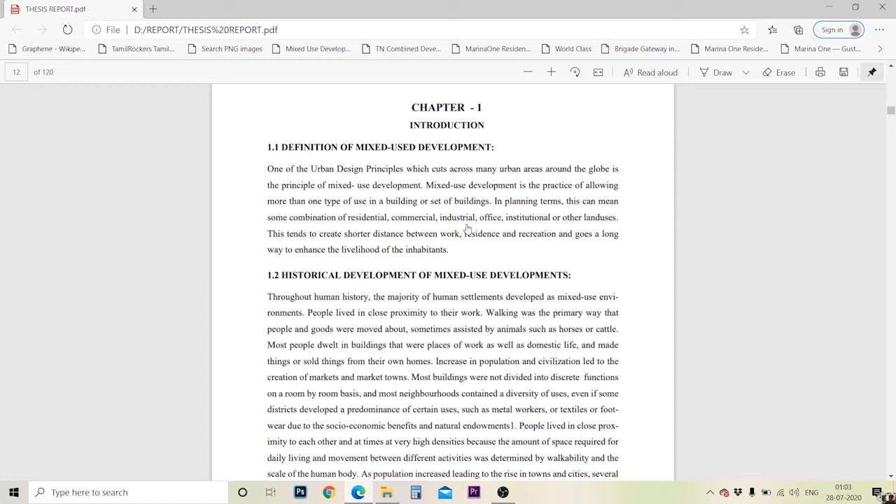Here is the introduction about what mixed-use development is, and how it has been practiced periodically over time, how it declined during the industrial period, and how, due to industrial growth, a new urban planning approach emerged in the 20th century, and how mixed-use development has since returned to modern urban life.

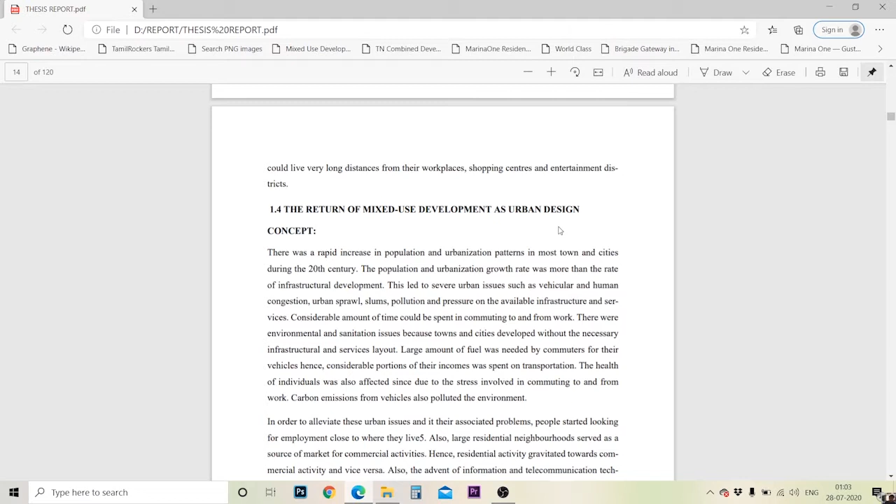These are the related theories about mixed-use development: transit-oriented development, smart growth, new urbanism, and intelligent urbanism.

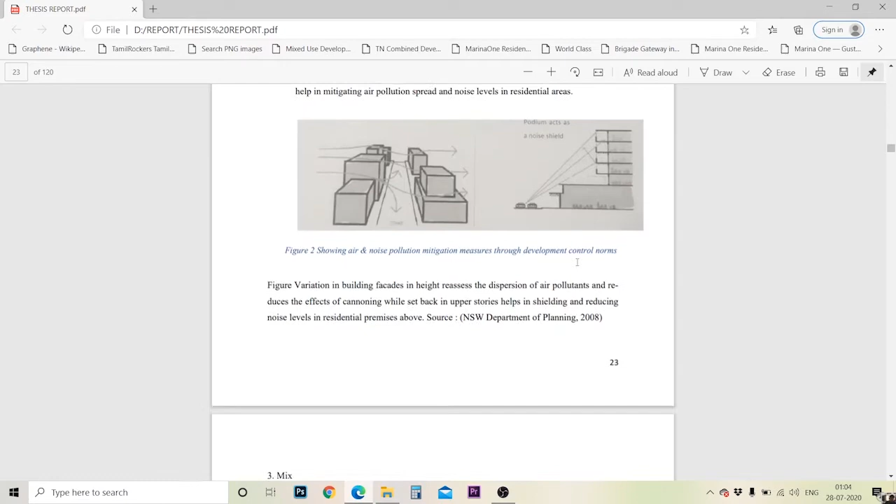There is a planning guide for mixed-use areas. These are the regulations for mixed-use development in Bangalore. The site is located in Bangalore, so the setback rules and norms apply accordingly.

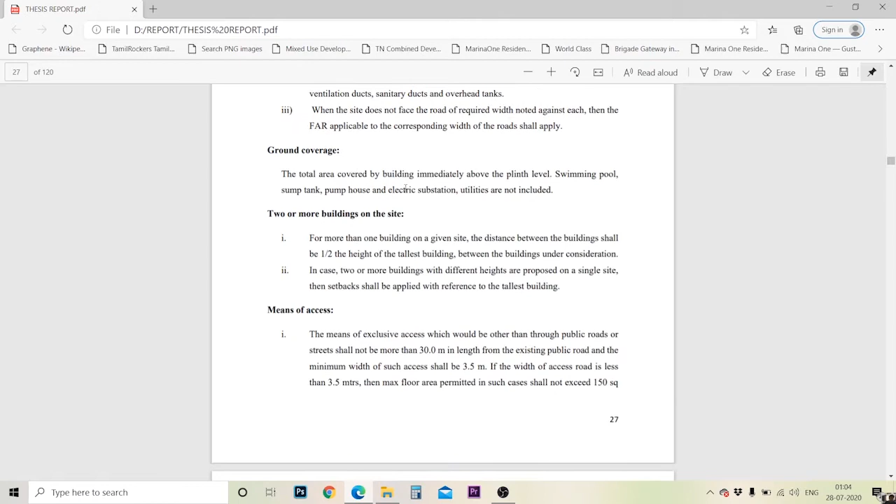This is the mixed-use development zoning regulation. The main land use should be residential, and the remaining should be commercial and other uses. The residential main use should be 70 percent of the land, and the remaining 30 percent of the total built-up area.

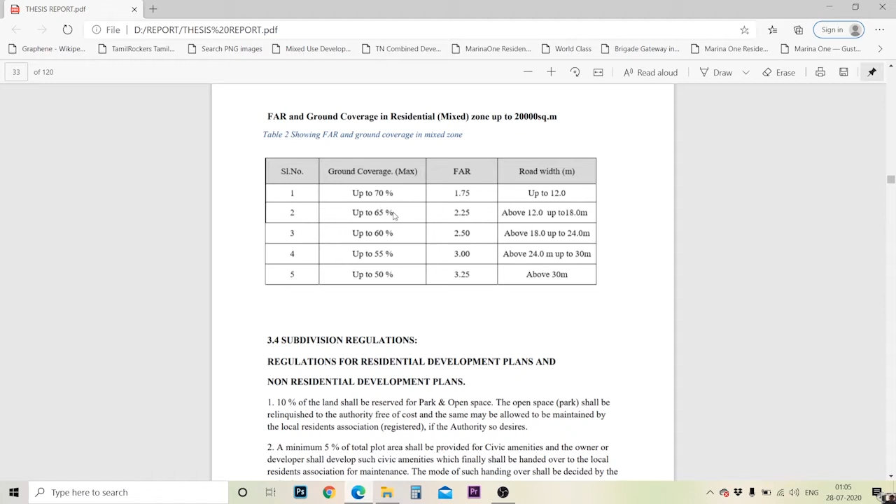For my site, the FSI is considered 2.25, as the road width is about 18 meters, and the ground cover is 65 percent. This is the parking norms and requirements, and amenities used. In chapter 4 we will discuss the case studies.

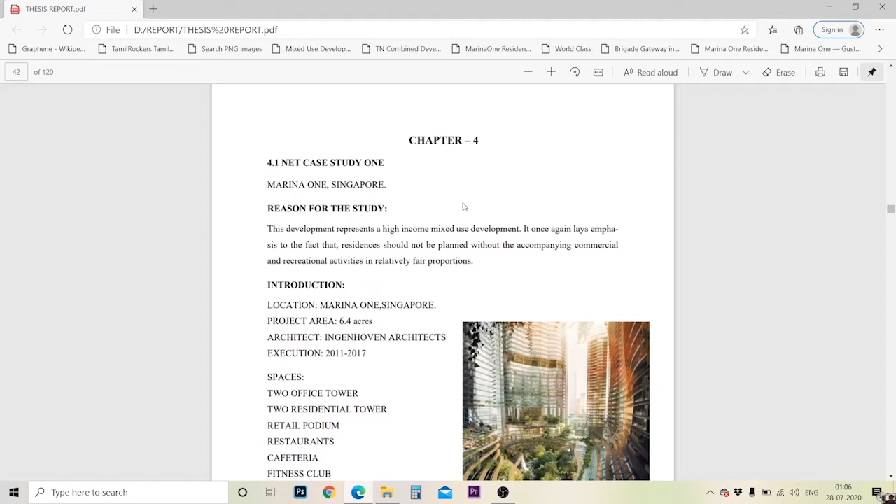This is my case study, Marina One, Singapore. Located in Singapore, this project site is around 6.4 acres, designed by Ingenhoven Architects.

It is a high-rise mixed-use development, consisting of 4 towers: 2 for office and 2 for residential, with a retail podium underground. All the entertainment and activities are given in the underground basement area.

One of the main features of this building is its pedestrian connection to four metro stations via the basement. This is one of the major advantages of this design.

This is the external view of the building. As you can see, curvy shading has been provided on the interior of the building to minimize heat gain and control heat entering inside the building.

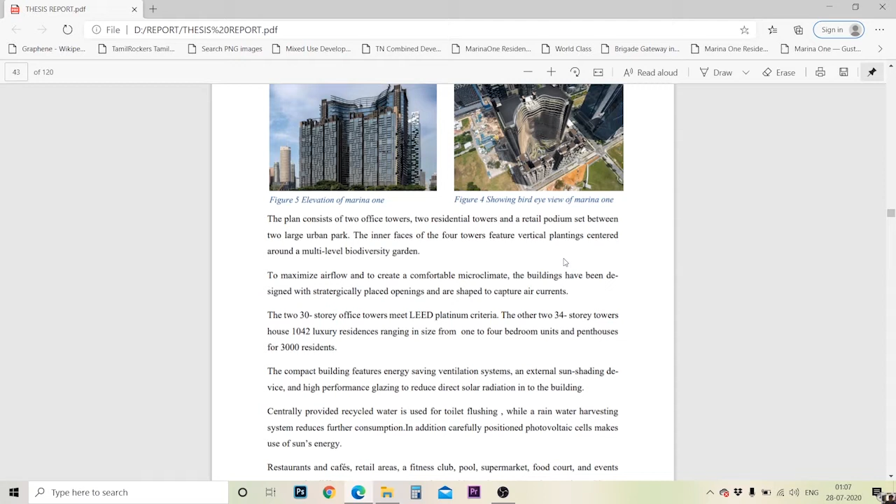This building has received LEED Platinum certification. The 34-story tower has 1,042 residential apartments ranging from 1 to 4 bedroom units, housing 3,000 residents.

Restaurants, cafes, retail areas, supermarkets, and food courts have been placed on alternate floors. As you can see, these are the metro station connections from the building. This is how the form of the building evolved, from concept sketch to external output.

This shows the number of units provided in the apartments with their square footage. One bedroom units have been provided in majority, since most residents work in offices, mostly needing 1 BHK units, so a higher amount of 229 units has been given.

The Marina One office has 1 lakh square feet office floor plates across a 30-story height, and it has direct connection to MRT lines.

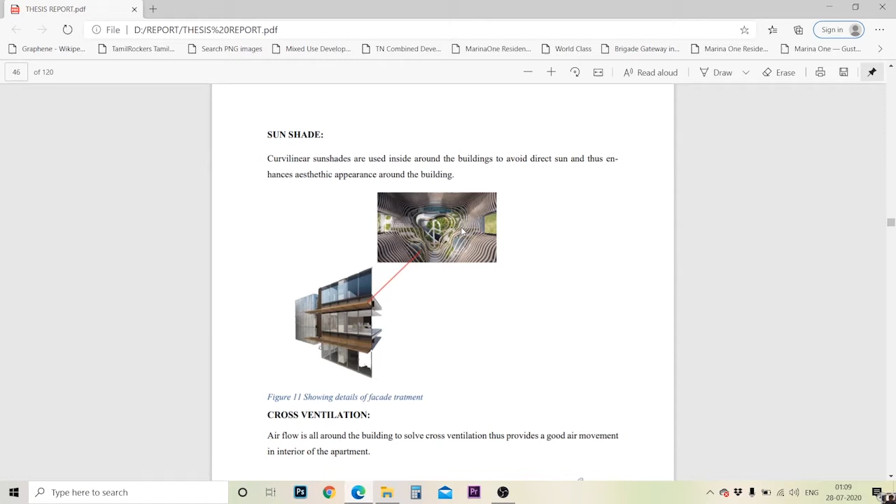This is the sunshade detail, showing curvilinear sunshades designed according to sun movements responding to the site. This apartment has been provided with cross ventilation in all units.

The second case study is Kohinoor Square. The reason I chose this is it is one of the only mixed-use developments with high-rise buildings built. This site area is around 4.6 acres, with residential, offices, shopping mall, a five-star hotel, and multi-level car parking.

This is a 50-story, 203-meter tall high-rise office building. On top of this is a hotel, restaurant, and recreational activities. It is one of the first skyscrapers in India to achieve LEED certification.

The climate of Mumbai is wet and dry. Its coastal, tropical location ensures the temperature does not fluctuate much throughout the year.

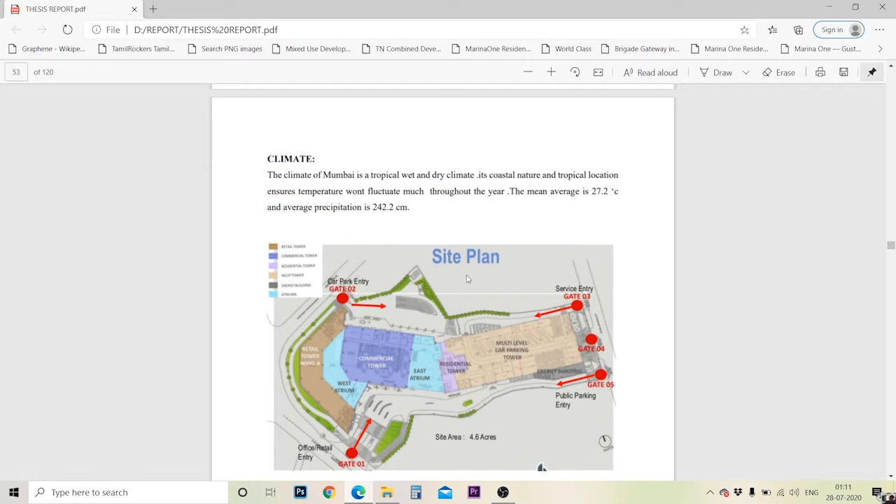This is the master plan. There are five entrances to this building. The main entrance from gate 1 approaches the retail tower and commercial tower. The second and fifth gates allow direct entry to the multi-level car parking, and gate 4 is for the residential tower.

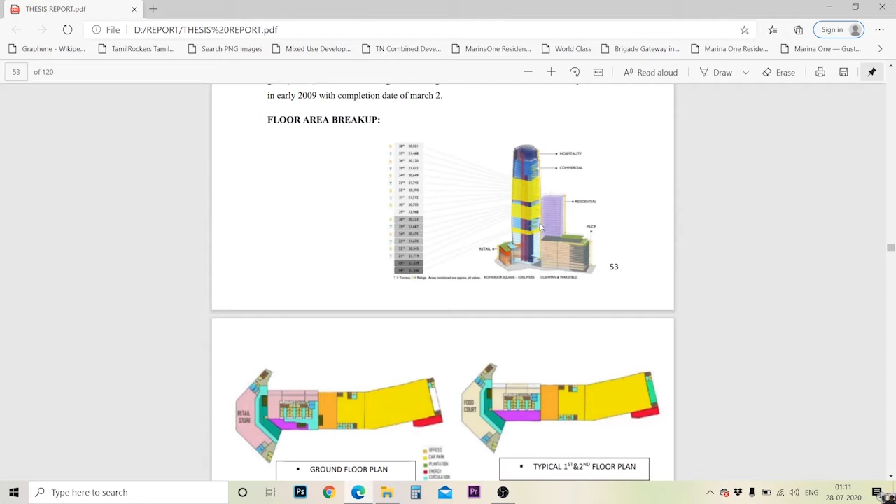The entries have been defined separately for each use. This is the floor area breakup. At the top of the tower you can see the five-star hotel and food court, behind which are the commercial offices, and at the bottom are the retail areas. The second level beneath the office tower is the residential unit.

It stands on top of the multi-level car parking, which is about 13 floors.

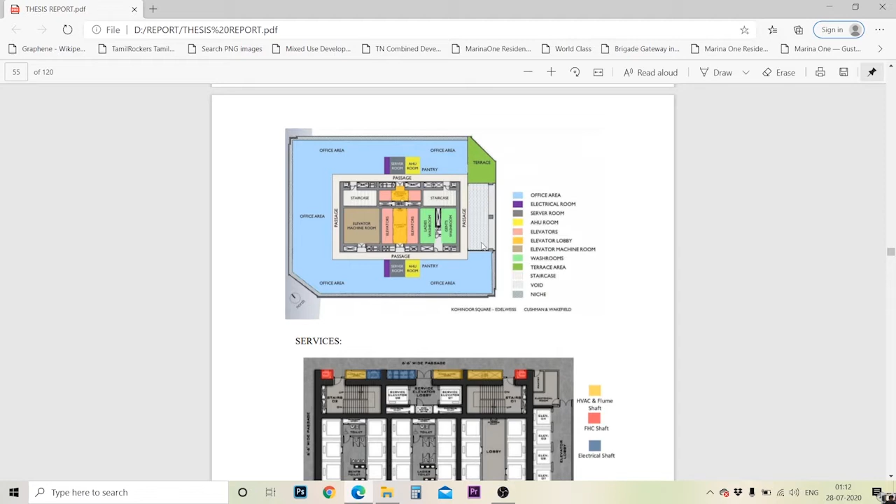These are the services provided around the core. The core is placed at the center, around which office spaces are provided for clear sunlight to minimize energy cost.

This is the office floor plate. The column placement from one column to another is 9.55 meters.

The footprint analysis: the multi-level car parking has capacity for over 2,000 cars. The first 13 floors of the building are used for parking, and the refuge floor is placed at the 11th floor.

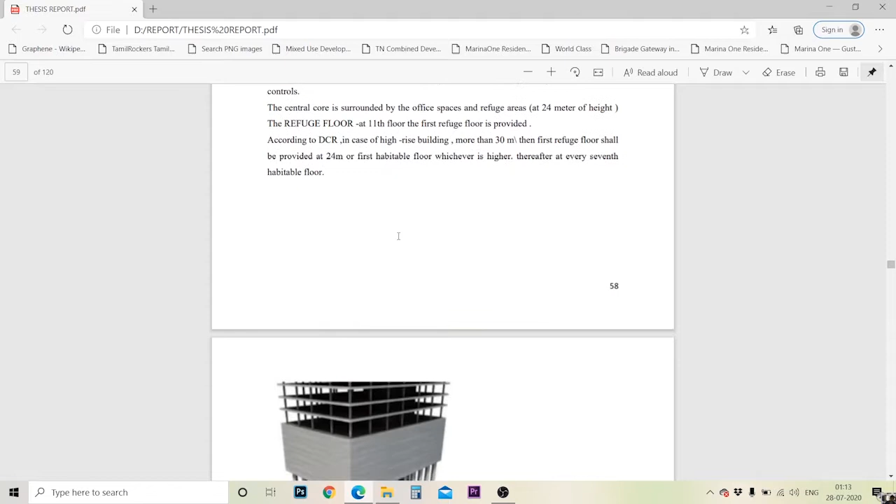The size of the column is 1.8 meters by 1.8 meters, with an average span of between 9.5 meters.

This is about the Kohinoor Square case study. The third one is a live case study which I visited in Bangalore - Brigade Gateway. It is a mixed-use development with horizontal development, and the first constructed mixed-use development in India.

Built horizontally, it's located in Malleswaram. The project area is around 40 acres, designed by HOK, and it has North Star Office Tower, apartments, Galaxy Club, Orion Mall, Brigade School, Columbia Asia Hospital, Sheraton Hotel, and a man-made lake at the center uniting all of it.

The project consists of 13 residential towers, each ranging from G plus 16 to G plus 18 depending on area, totaling 2.2 million square feet.

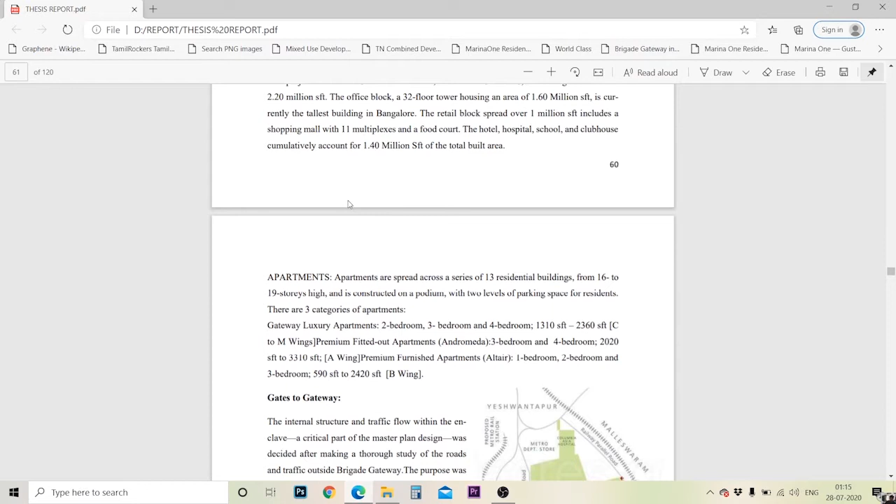The office block has a 32-floor tower housing an area of 1.6 million square feet. The retail block, spread over 1 million square feet, includes a shopping mall with multiplexes and a food court. The hospital, school and clubhouse cumulatively account for 1.4 million square feet of total area.

The apartment building is 19 stories high, constructed on a podium with two levels of parking. It has three categories, differing from two, three and four bedrooms in square feet.

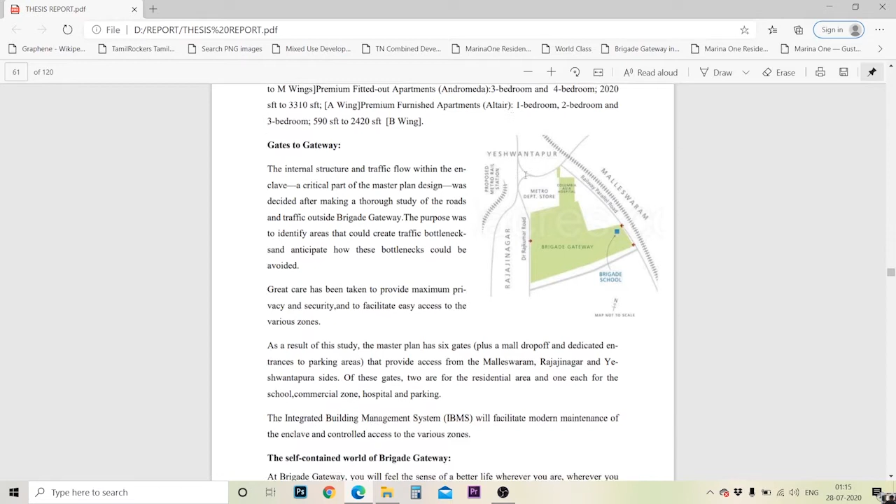You see the site plan here. This is the apartment area, this is the shopping mall, this is the office tower, and this is the multi-level car parking. This is the five-star hotel, this is the hospital, and this is the Brigade School. Each of the entries has been defined separately for private purposes.

The office, apartment, and entertainment activities have been united through an artificial lake to create an interactive space. This is a view of the man-made lake from Brigade, which covers around 2 acres of land.

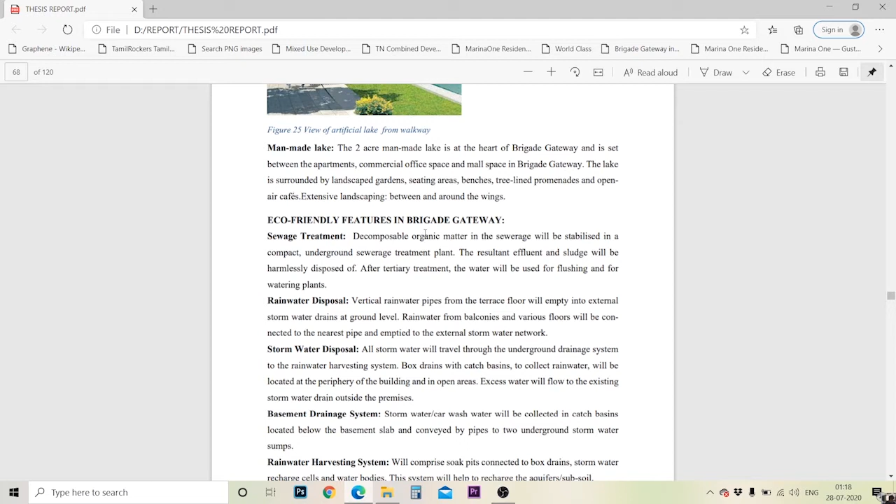These are the eco-friendly features provided in Brigade Gateway. They also provided a sewage treatment plant, rainwater disposal, stormwater disposal, and a basement drainage system, all well planned as part of the site's infrastructure management.

Apart from floor plans, this is the Orion Mall plan.

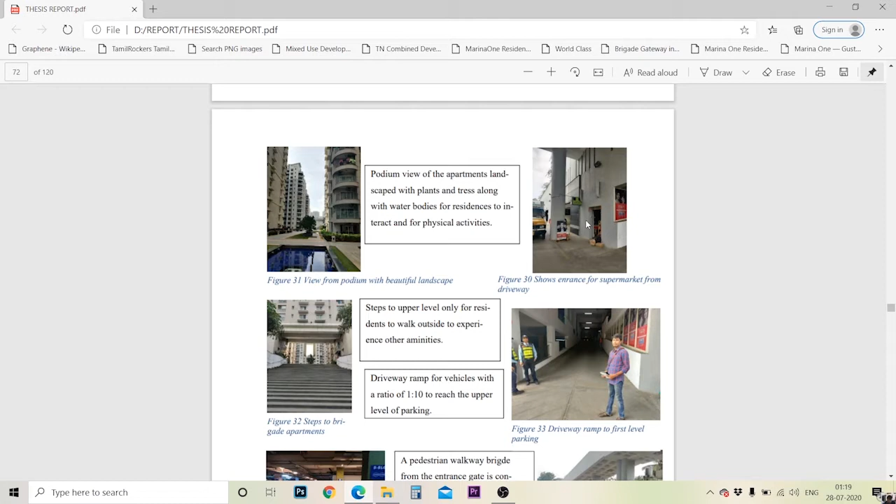These are the site photos. This is the podium view of the apartments. This is the supermarket, which is very tiny, but it's okay since there is a mall there so people can go for larger purchases of goods.

This is the entrance walkway with stairs to the apartment podium level, and this is the basement entry.

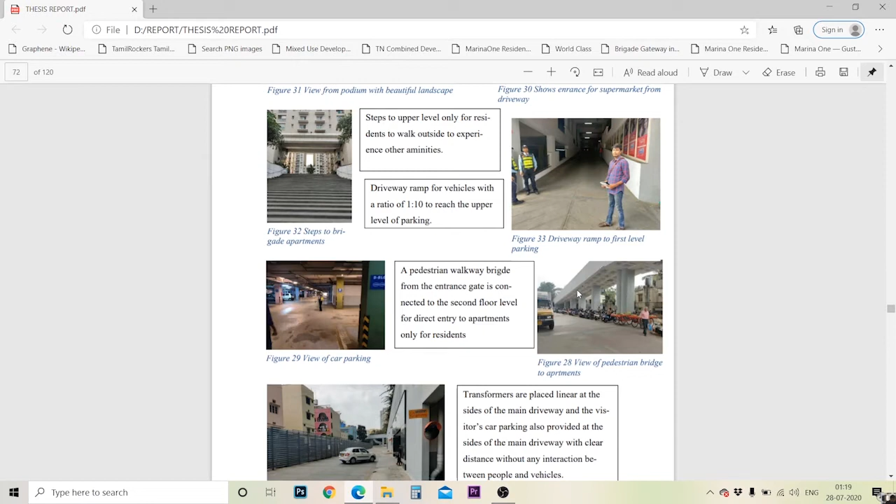This is the podium view, and this is what's called the sky bridge - it directly allows residents to move from the street to their apartments.

These are the transformers and electrical control areas, placed on the sides of the driveway.

Another live case study is from Bangalore, called Mantri Alpyne. It's a residential mixed development located in Banashankari. The project area is 10.23 acres, by architects Mantri Developers Private Limited.

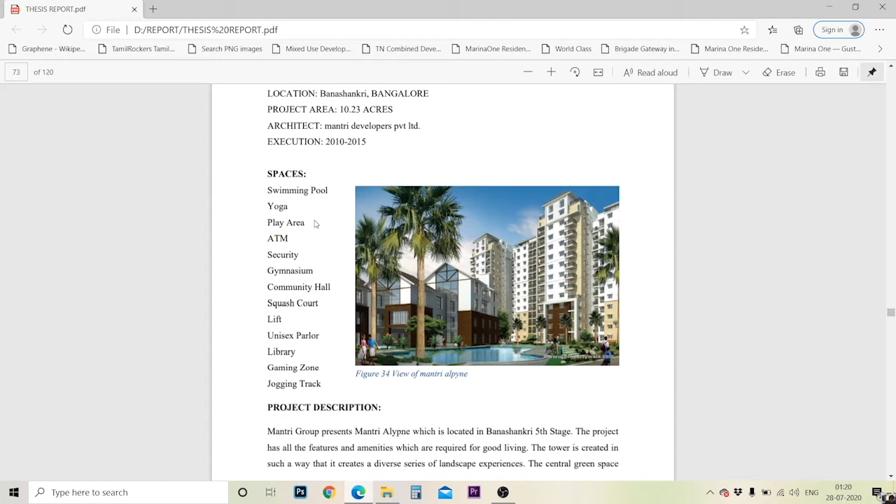Constructed between 2010 to 2015, it includes a swimming pool, yoga area, play area, ATM, security, gymnasium, community hall, squash court, lift, and gaming zone.

This is the site location - you can see the north. The site plan covers almost 18 towers with a clubhouse and central park.

It has a northeast entry. Primary vehicular movement has been restricted to the periphery. Blocks are clustered and wrapped around the primary driveway, and the entire central zone forms a park-like ambience with seamless pedestrian movement.

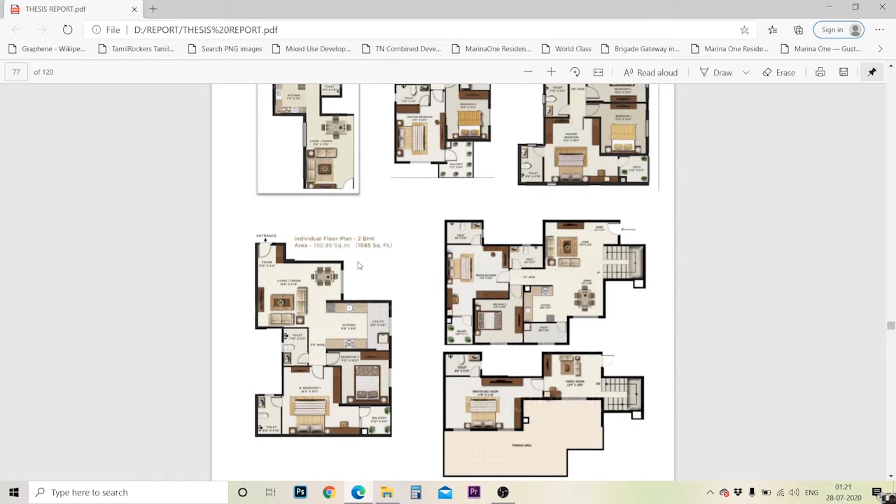These are apartment floor plans. These are the 2 BHK units, and there are a lot of types in 2 BHK. This is the overall floor plan. There is a two-wing type, wing A and wing B, placed respectively in order. These apartments and the toilets have been ventilated through ducts.

So, clubhouse. The clubhouse has a variety of entertainment activities and sports, and the services they provide.

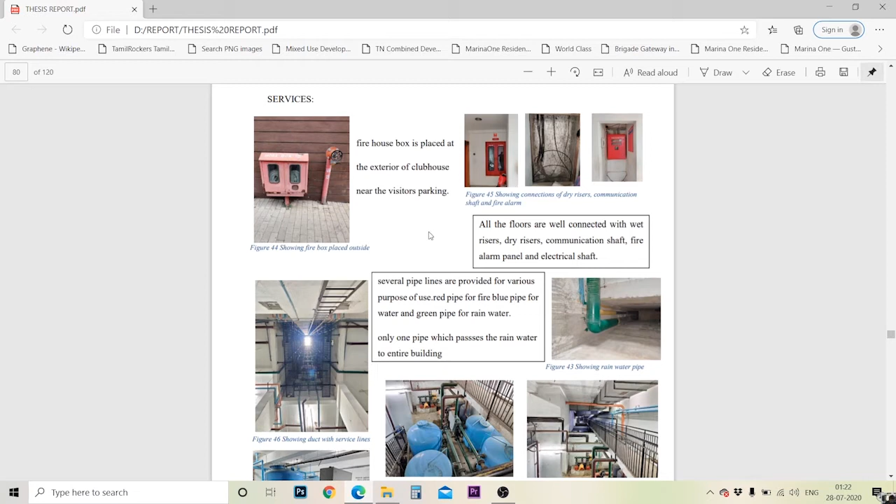Each apartment has a dry riser and communication shaft. This is the shaft duct area where all the pipelines have been connected. This is the rainwater system. At the basement level, they have sewage treatment in basement level 2, and in basement 1 they have a water treatment plant.

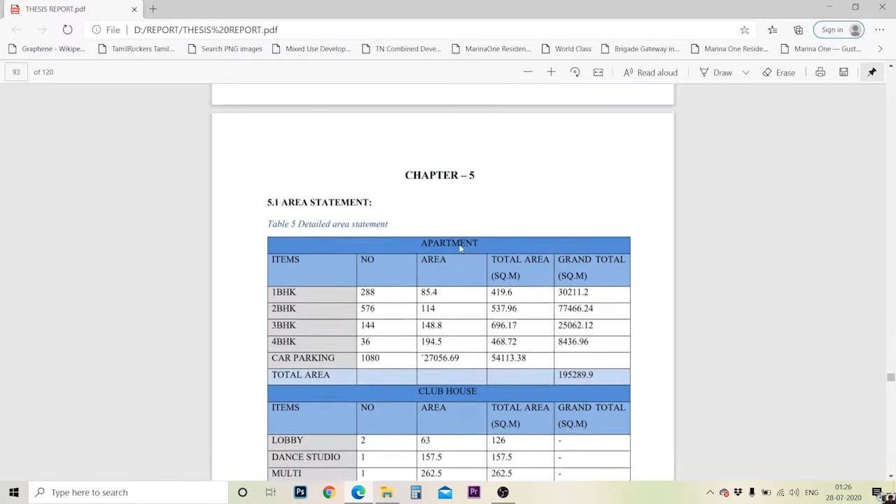Chapter 5 is about area statements, all detailed in this. You will have a detailed area report.

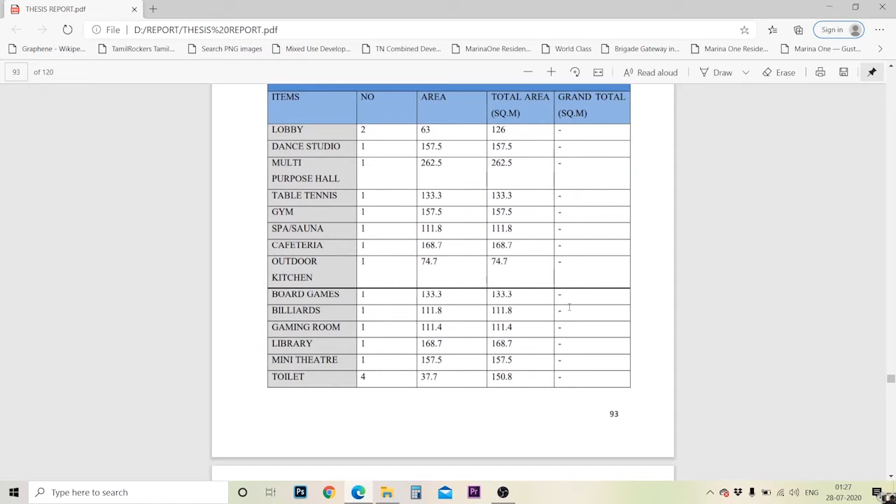Okay, let's see about site analysis. It's located in Hebbal. Hebbal is located on the north side of Bangalore. It's one of the famous places in Bangalore, Hebbal area.

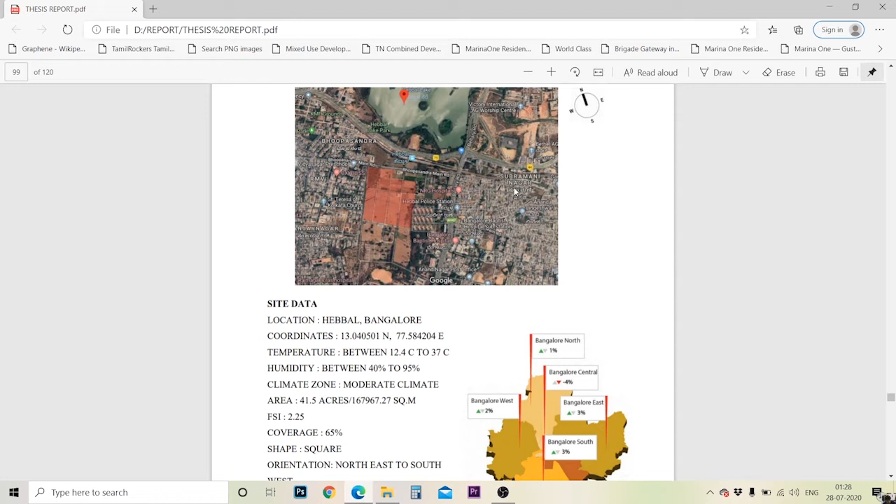From the beneath, my site has been located. In between, the railway track has divided my site and the Hebbal lake.

Okay, why did I choose Bangalore? Bangalore has been one of the fastest growing cities of India. It is also known as the IT hub. Many high net worth individuals have been growing in Bangalore, mainly in the central business district, secondary business district, Whitefield, and North Bangalore.

Due to more traffic conditions and pollution in Bangalore, many offices have been providing residences to their workers nearby. It has been changed to mixed-use developments, as you can see in the case studies.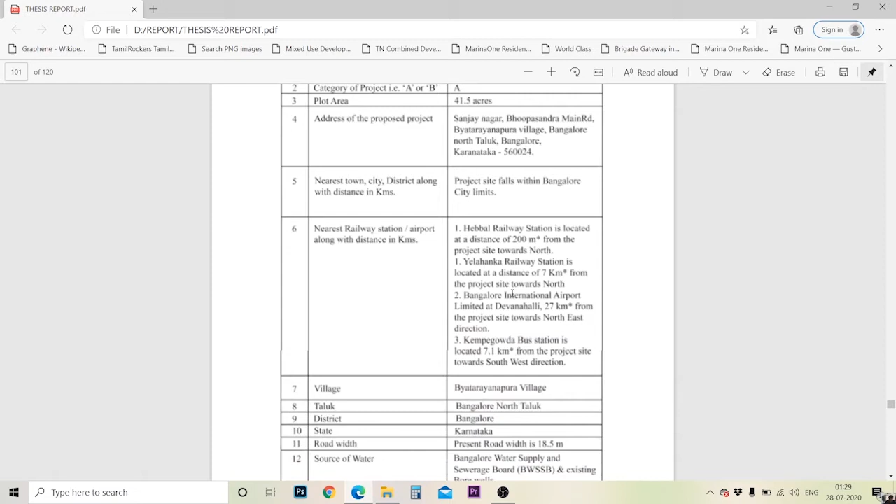This is my site details, nearby proximity. You can see the airport. The railway station is very near from the site. In the future, there is also metro planning in that area, so it is very easy to communicate to different areas.

And some portions of the site, you can see in this image, there is a coconut plantation here, coconut trees.

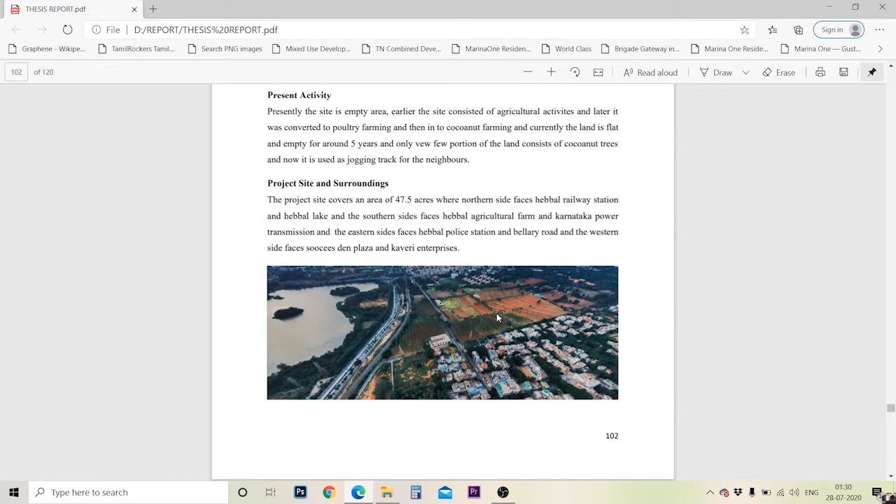This is the existing site. These are the coconut trees in the site. I just retained these coconut trees except a few, and these few have been transplanted to another area.

The site is surrounded by residential and commercial zones. This is the major wind direction. This is the sun path.

As you could see in this image, this is a coconut tree, and at the end of this site you will see a drainage. So all the major infrastructure is near to the site.

Okay, let's see my presentation sheets in detail.

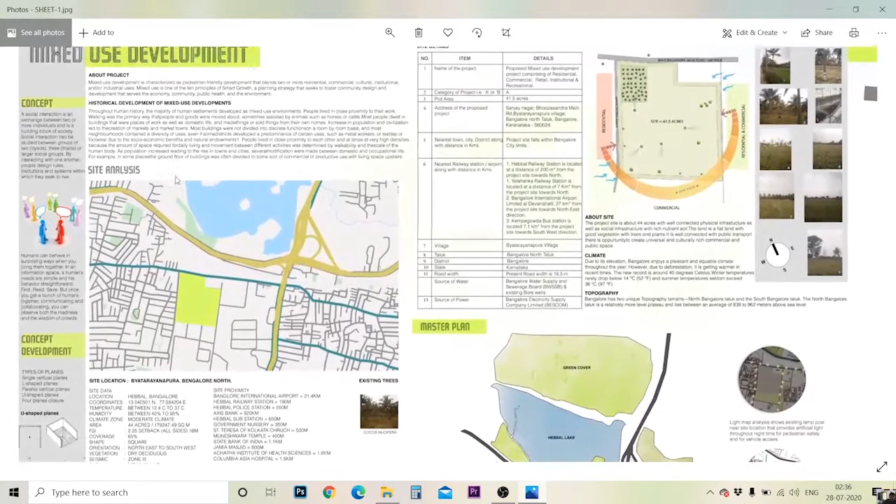Here is about the project and the historical development of mixed-use development. The thesis concept is about social interaction. Social interaction is an exchange between two or more individuals and is a building block of society.

The reason why I chose social interaction: in day-to-day modern life, people face many stressful activities around the world due to environmental degradation, pollution, and other personal impacts on human beings. I think this is mainly due to less interactive work they perform in their day-to-day life. To overcome these effects, I introduced the concept of social interaction throughout my design.

Let's discuss it later.

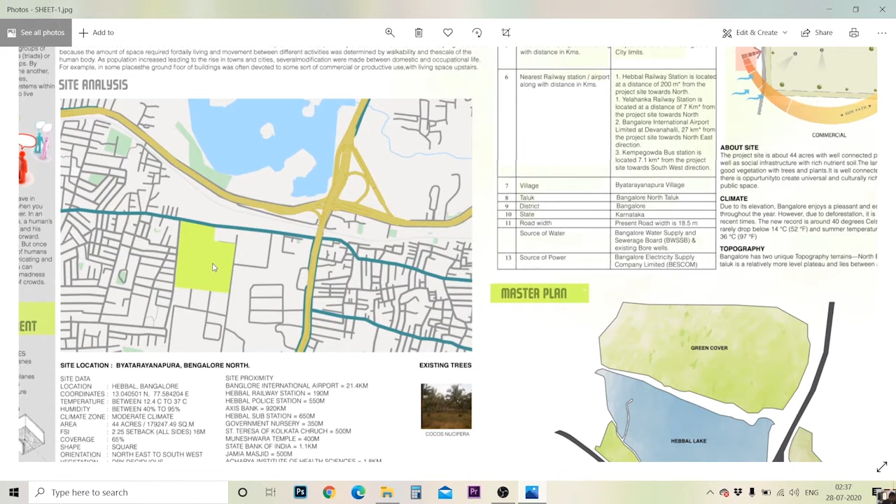Okay, this is a site analysis map. As you could see, the green layer is my site, along with major road connections and services. You can see that in this image.

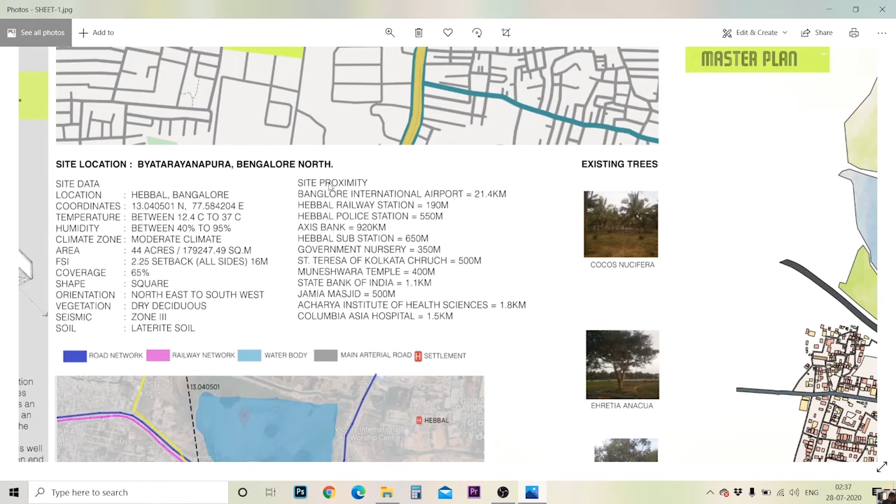This is site data: all coordinates, temperature, humidity, climate zone, area, FSI, and the site proximity near my site. These are the existing trees on the site. These are the physical infrastructures surrounding the site.

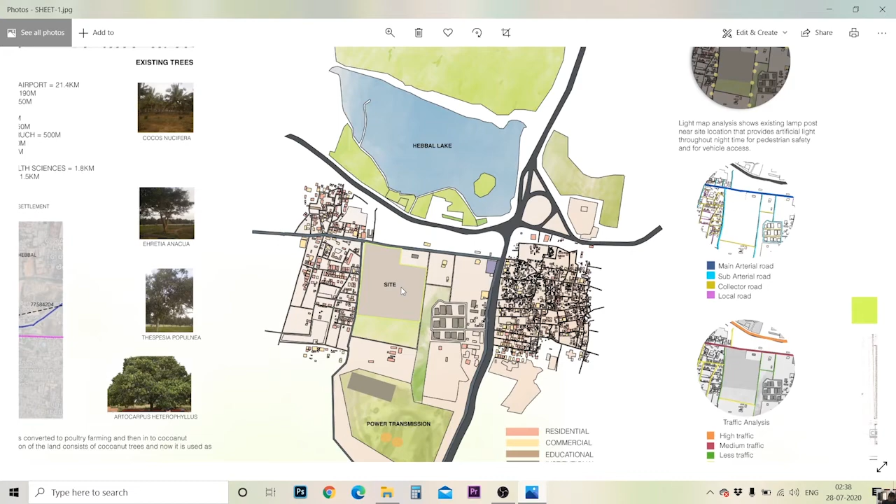You can see in this master plan, the main road, expressway, and the main arterial road connecting my site on three sides. The site is well connected with physical infrastructure, with no limitations. Residential, commercial, and educational areas surround the site.

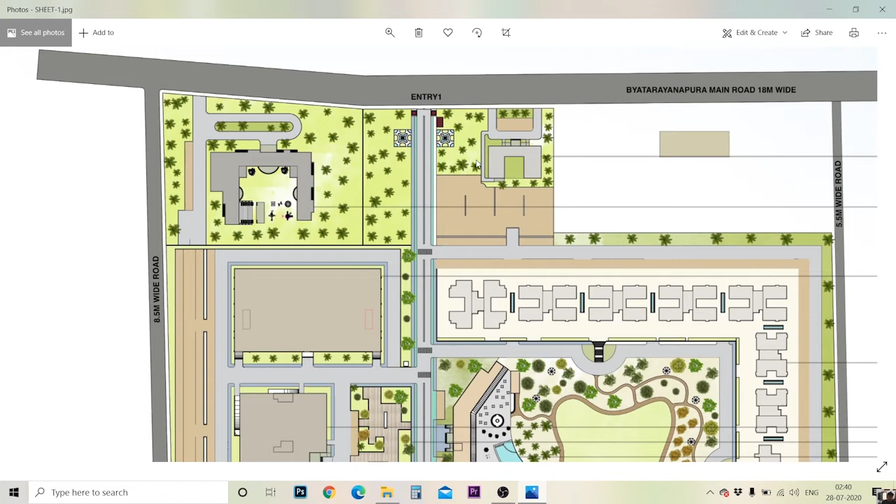The main entry approaches through office and apartments, and the second entry approaches through office and supermarket. Separate entries for school and primary healthcare have been placed so that outside people can access them without interfering with the main activities inside the development.

Starting from primary healthcare, this is the entry where you can park the vehicle. Another small service road connects to the backside of the building to remove waste from the healthcare facility without interfering with the patients inside.

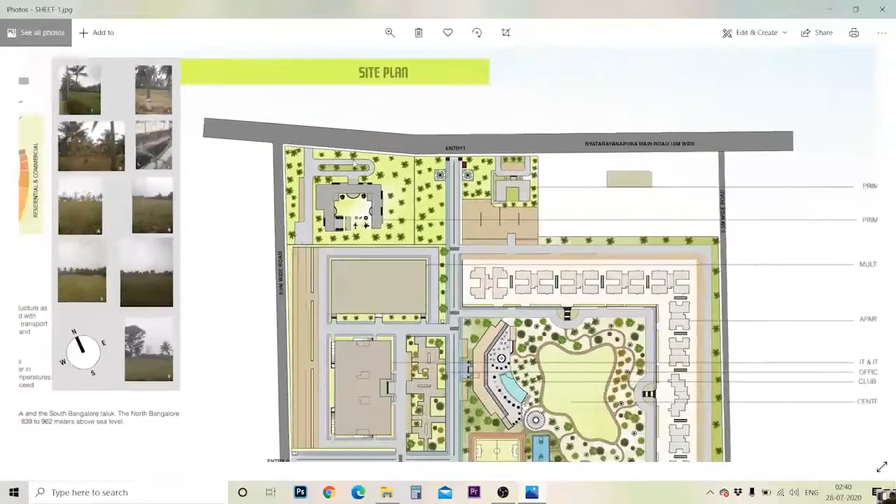This is the school area. These are the existing coconut trees, and I have replaced them here, so the vegetation has not been decreased.

From here you can enter the office entrance, main entry. This is a multi-level car parking, and this is the main office tower, 12 floors. It has multi-level car parking with 5 floors, and surface parking provided at the back. From the surface, they can enter directly to the service lobby and then to the main office area. This is the private park for office people, and visitor car parking is also provided here.

The apartment has been arranged in a U-shaped plan. The main advantage of the U-shaped plan is that it has central coverage and allows users to form around the central area, becoming a social interactive space.

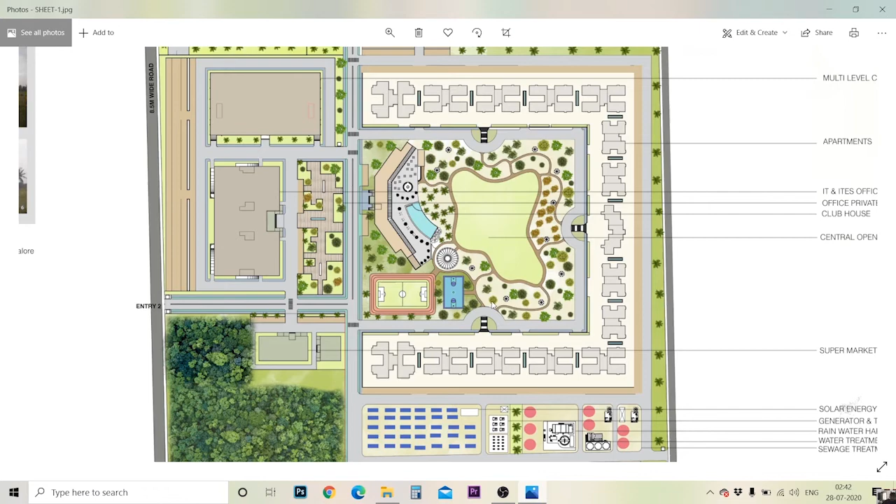The central space I designed is a central park with a large number of trees of Bangalore native species. The central park is designed like a forest concept, with numerous trees around the park and gazebos for seating. The central lawn is free of trees and open to everyone, so they can do whatever they want.

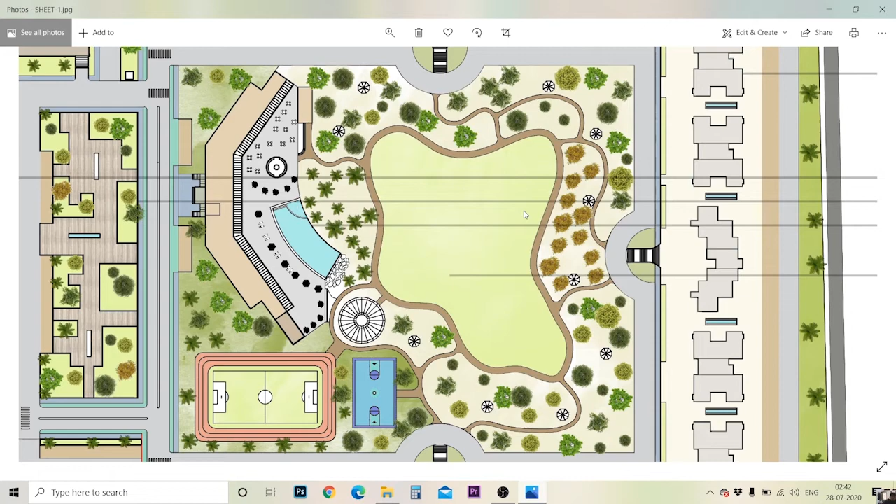At the second entry you can directly enter the supermarket, since it can be accessed by outside people also, so I placed it separately.

At the back side of the master plan, all the services have been connected: this is a sewage treatment plant, water treatment plant, rainwater harvesting, generator and transformer control room, and this is the solar plant which I have provided.

We divided my site plan into 5 zones. Zone 1 is the largest, the residential units; zone 2 is the IT and ITES office; zone 3 is the primary school; zone 4 is primary healthcare; and zone 5 is the supermarket.

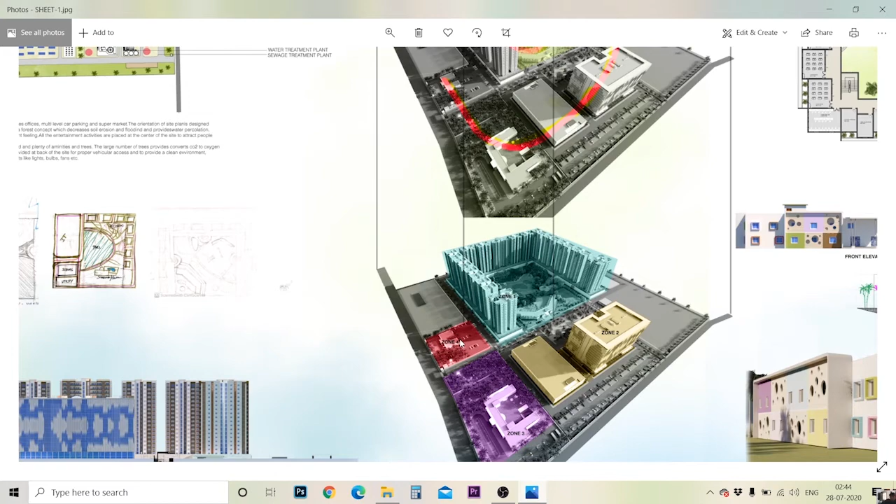Let's see about the design. This is a primary school, consisting of all basic amenities for children and administration to function. It comprises LKG, UKG, and first to fifth standard, plus 14 classrooms, well ventilated with cross ventilation, allowing light on 4 sides for natural ventilation.

The playground is at the center for all students to access from all sides. It has a capacity of 333 children with all basic amenities for a primary school. The design forms the primary school as a U-shaped plan, creating open space at the center where the OAT and play areas are designed, also providing light on all sides of the building to get clear sunlight during daytime, minimizing energy cost.

This is the OAT, and this is a ramp entry for the school.

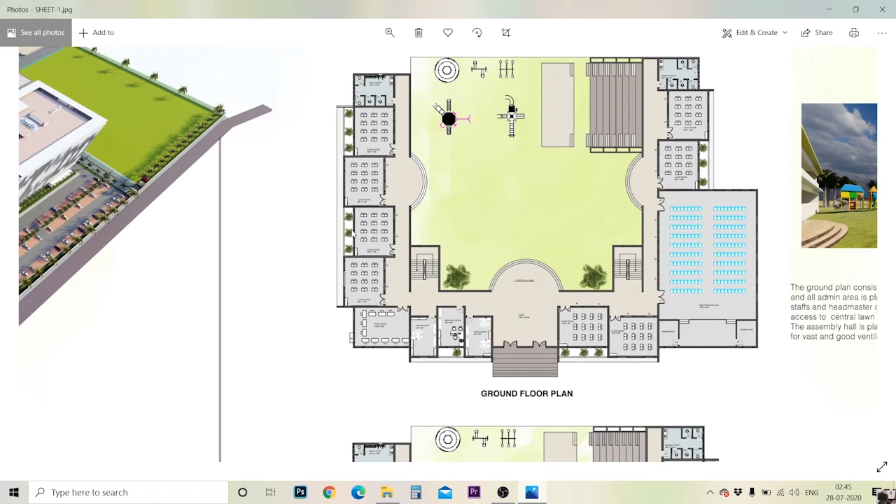If you can see in this plan, the rooms have been staggered. The reason I staggered this is that as the sun enters and reflects on the building, the staggered portion creates a reflection shadow on the other side of the wall, which minimizes the heat and gives a comfort feeling inside the building.

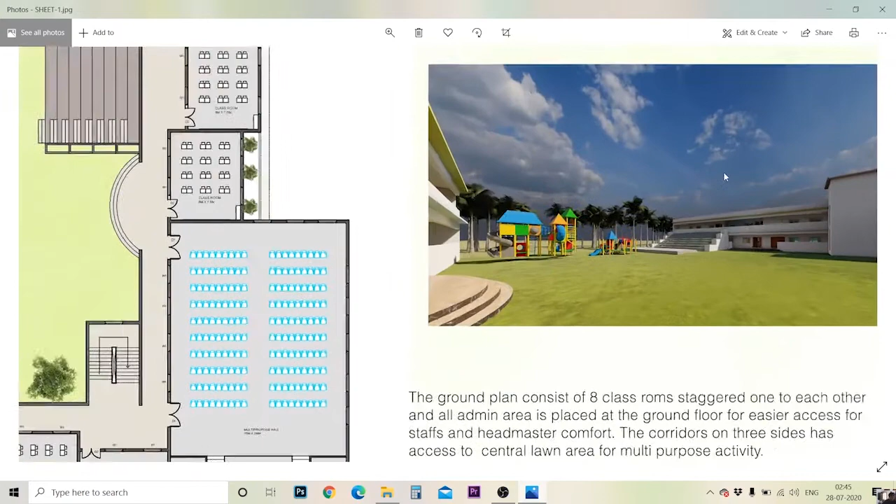You can see a two staircase approach for the first floor. All three corridors provide access to the central green lawn. At the end of the corridors, toilets are placed separately, and a multi-purpose hall is provided for 336 children. This is the central open lawn area with OAT and play area.

The first floor consists of the open art gallery, where students can exhibit their skills. A caretaker room is also provided. The multipurpose hall has a double height ceiling, as you can see in this elevation.

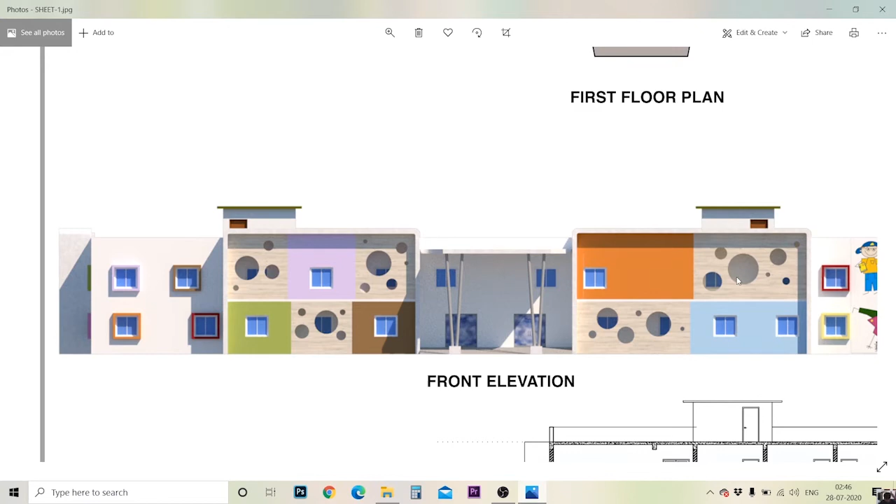A circular pattern is created on the elevation, creating a void between the exterior wall and the outside, minimizing the heat of the sun. This is the overall view of the school.

Okay, let's see the second sheet. This is the primary healthcare facility, which comes under zone 4. Primary healthcare refers to essential healthcare based on scientifically sound and socially acceptable methods and technology. This makes universal healthcare accessible to all individuals and families in the community, through their full participation and at a cost that their community and country can afford, maintaining it at every stage of development in the spirit of self-reliance and self-determination.

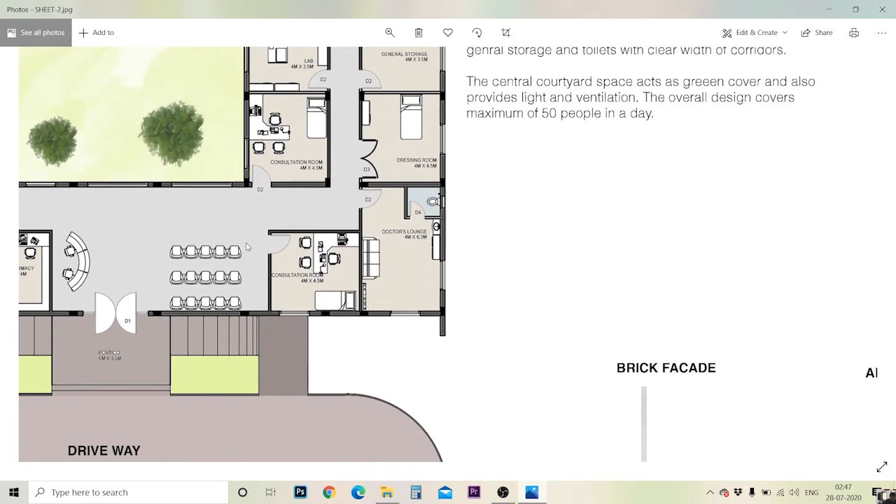This is the approach to the plan. This is the entry, where you can park the vehicle, and there are two ramp accesses for physically challenged visitors, leading to the main portico area. From there you can enter the reception and waiting area, from which you can directly access the consultation rooms, with a separate doctor's room here.

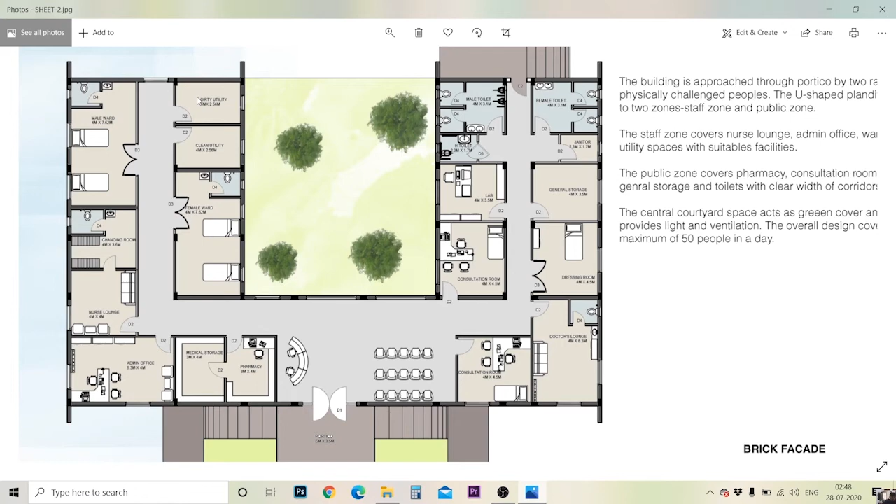The overall plan is divided into two zones: staff zone and public zone. The public zone has the consultation room, toilet, storage, and lab. The staff zone has the nurse lounge, separate female and male wards, dirty utility, cleaning utility, and admin office. A pharmacy is placed at the center.

From the waiting area you can see the natural beauty of the central courtyard, so a positive vibe is created throughout the plan. This is the elevation.

The front of the elevation is treated with brick facades, and the exterior walls are treated with aluminum composite panels. I chose aluminum composite panels because they have more durability, are weather and stain resistant, acid-free, low maintenance, safe to use, and can be cut into whatever design is needed.

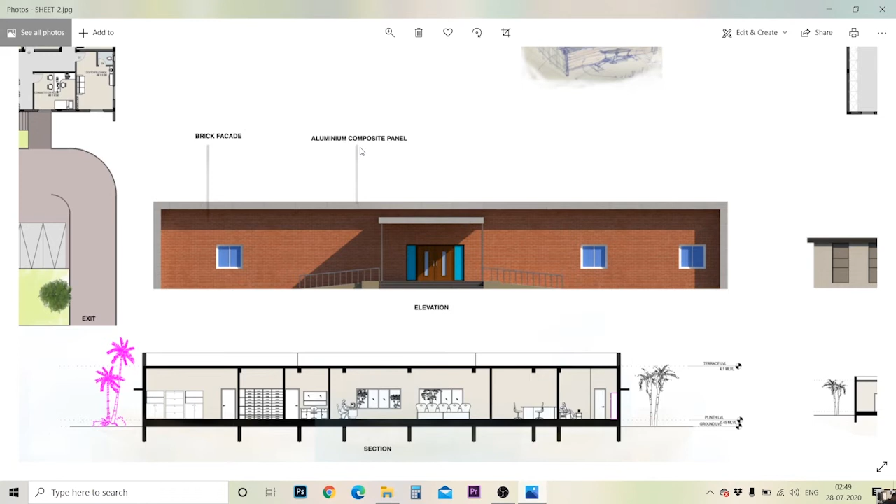This is the section. This is the waiting area, and you can see the exterior courtyard. This is the pharmacy, this is the admin office, this is the consultation support and doctor's lounge. This is the main view.

Second, another one is zone 5, the supermarket. The supermarket is planned very intensively, accessed by a portico with two ramps. On the front, you will see fresheners and deodorant racks, so when people enter this supermarket they feel a freshness. A positive vibe is created when entering the supermarket.

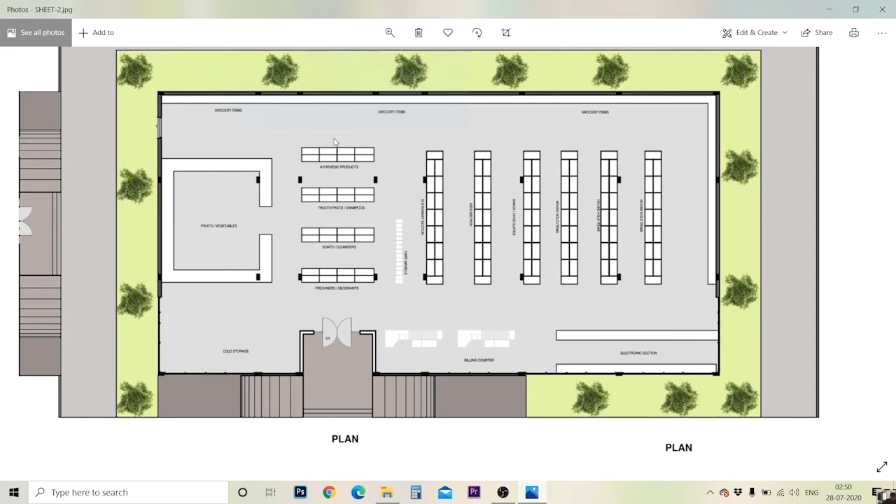The grocery items are placed at the back side of the plan, so people have to cross all these items before reaching the main grocery item. This makes people buy all these items unconsciously, as their mind is deviated to buy them. All this planning has been maintained properly.

The electronics section, the fruits and vegetables section, is a cold area section, and a separate storage block is provided outside the building, containing admin blocks, staff room, toilets, and storage units. The elevation of the building is treated with aluminum facades and curtain walls.

Let's see the view. It's a clubhouse.

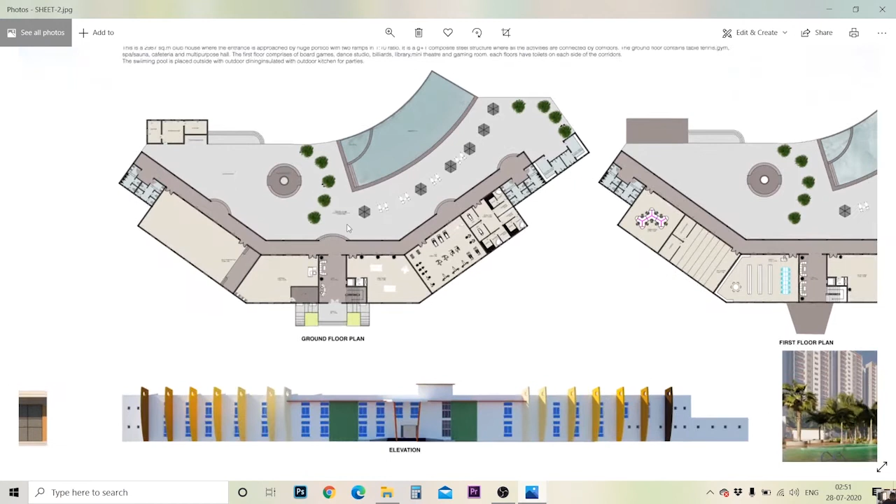The clubhouse contains various entertainment activities, with a main portico approach by two ramps. You see a central lobby here, and then corridors connecting all the entertainment spaces.

From the ground floor, you can access the outdoor swimming pool area and outdoor dining area. A separate changing and shower area is provided outside, so people can access them directly from the swimming pool.

The first floor area is provided with indoor games, a dance studio, a mini theater, and a gaming room.

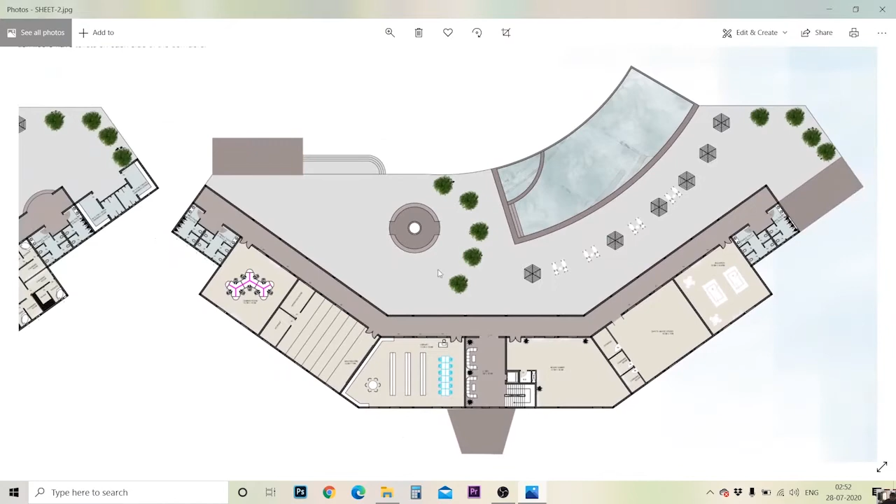This is the elevation. It's treated with fin walls that provide a shield to the building. They not only provide an aesthetic appearance but also minimize the heat entering the building by providing shade on the walls. You can see the section here.

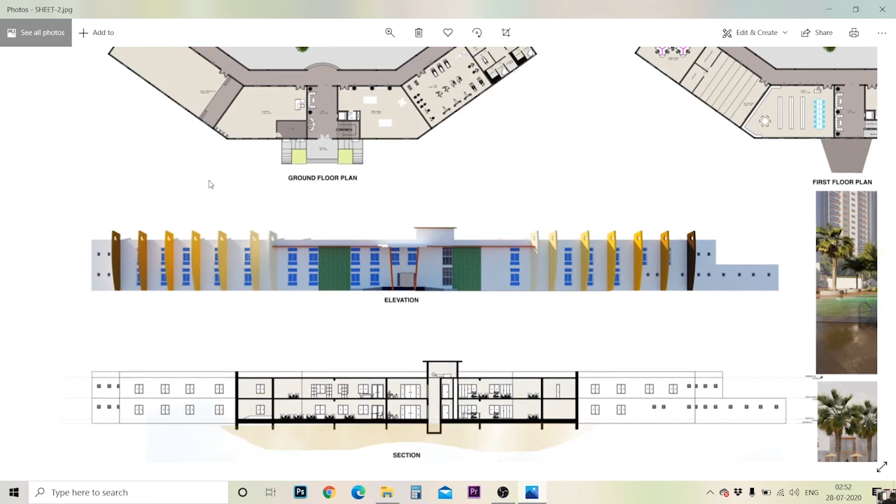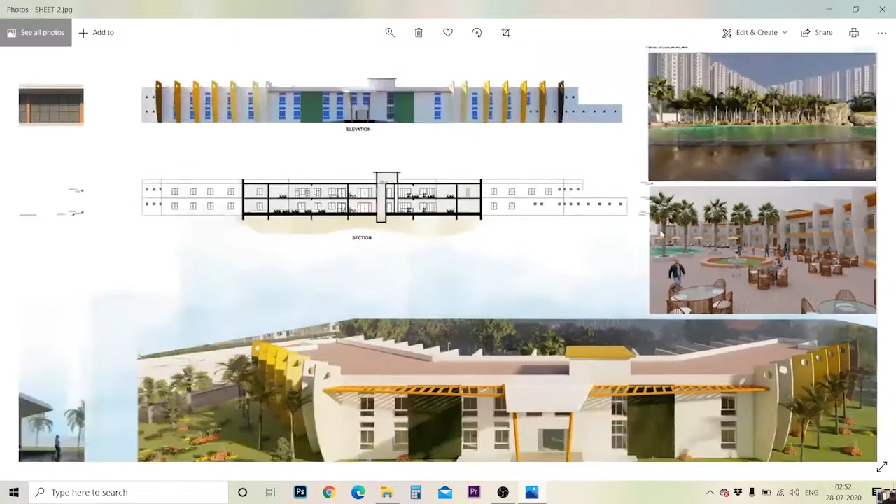This is the swimming pool view. This is the outdoor area, with fin walls provided outside. This is the outdoor dining area. This is the overall top view of the clubhouse.

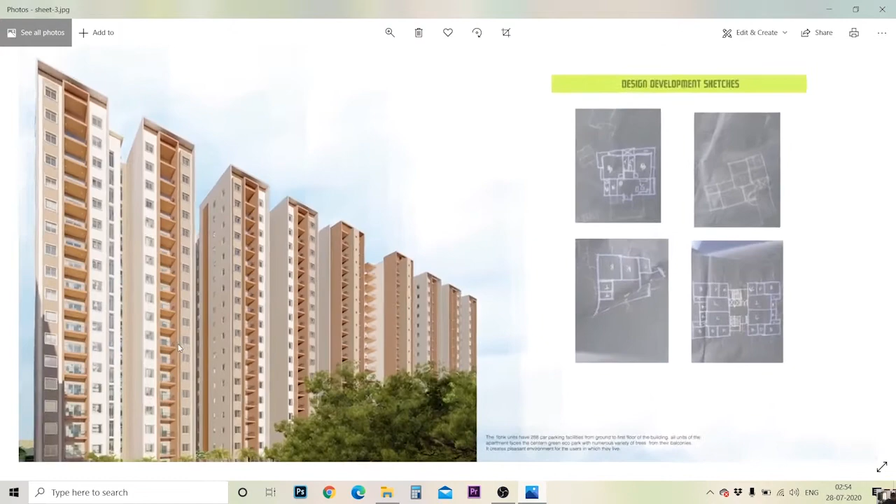The 1 BHK unit has 288 units arranged in floor blocks from second floor to 18th floor. This is the overall view of the building, the concept of plan, design, development sketches. This is the elevation and section. As you can see, the ground and first floor is parking, and then the apartments are placed on the podium.

It's a 2 BHK plan. The 2 BHK has 576 units with cross ventilated rooms for natural ventilation and light for healthy living. All the areas have proper spacious rooms with proper functions. All the floors are connected by lifts and staircase for circulation. The 2 BHK unit has 8 blocks named alphabetically where all the faces and view the Central Park, which makes residents occupy the Central Park, which in turn creates social interaction.

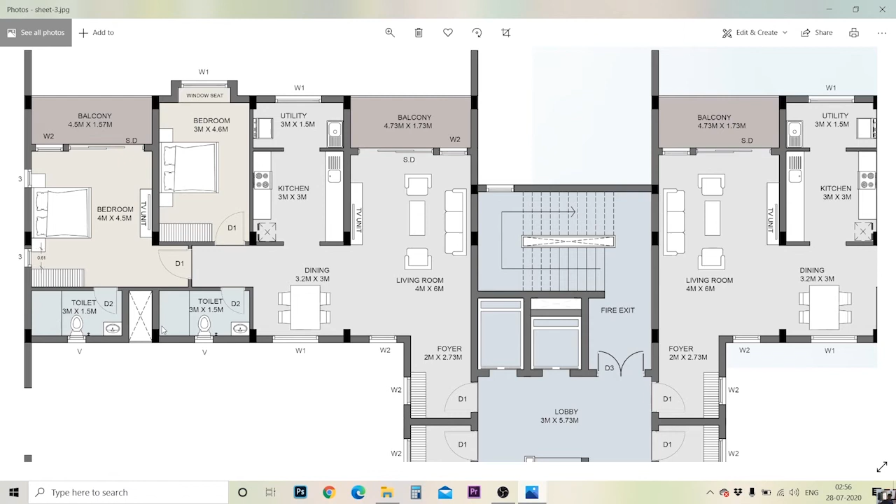There is a master bedroom with balcony with attached toilet. This is a common toilet. And a duct has been provided in all toilets to avoid appearance of pipelines.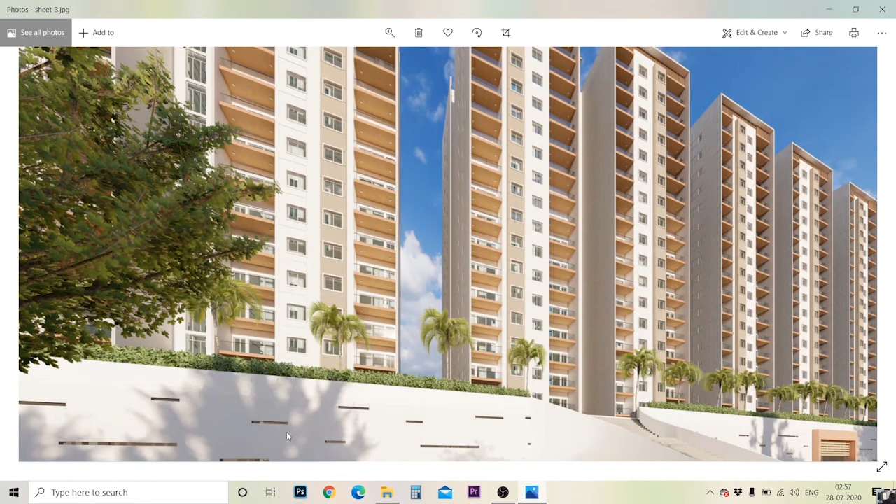This is the elevation. This section is the overall view of the 2 BHK standing on a podium. This is the staircase from the ground level to the podium. The podium has been treated with randomly opened facades. The exterior of the 2 BHK is treated with black concrete material. The balconies have been treated with outdoor wooden planks.

This is the podium view of the 2 BHK. This is the balcony view from the apartment to the central park. 3 BHK unit - this 3 BHK unit is placed in the front of the apartment as it is larger in form. All the rooms have cross ventilation effect for proper light and air to create a healthier environment. Each unit has a separate foyer outside, and all the units have at least one view of the central garden.

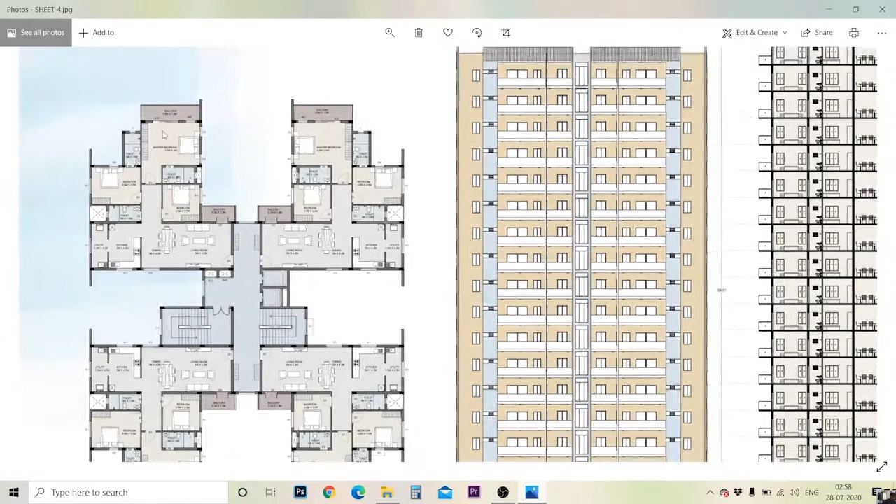See in this plan, this is the circulation area with proper fire hydrant and vertical duct. Then you can see a common foyer for two units. From then you can enter living and dining. From the living you will have a balcony view. So cross ventilation has been solved here - windows, kitchen, and you will see cross ventilation.

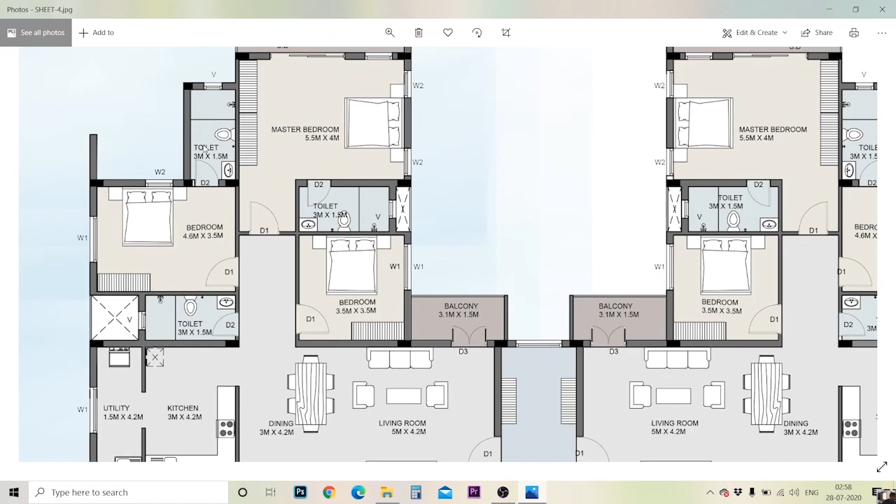This is a guest bedroom with a common toilet. This is children's bedroom, this is a master bedroom. This is the elevation. All the elevations of the apartments have been treated with thin walls, finished with concrete material. This is the overall view of the apartment - it stands on a podium. And you can see the car parking of ground and first floor treated with randomly placed facades.

This is a 3 BHK unit, one of the premium units of all the three. It has a good foyer, and then you can see a big living room, a great dining with a balcony view, and a kitchen with cross ventilation. From then you can see a small corridor connecting all the bedrooms.

This is a master bedroom with a walk-in closet and attached toilet. These are the children's bedrooms, and you can see a guest bedroom with an attached toilet.

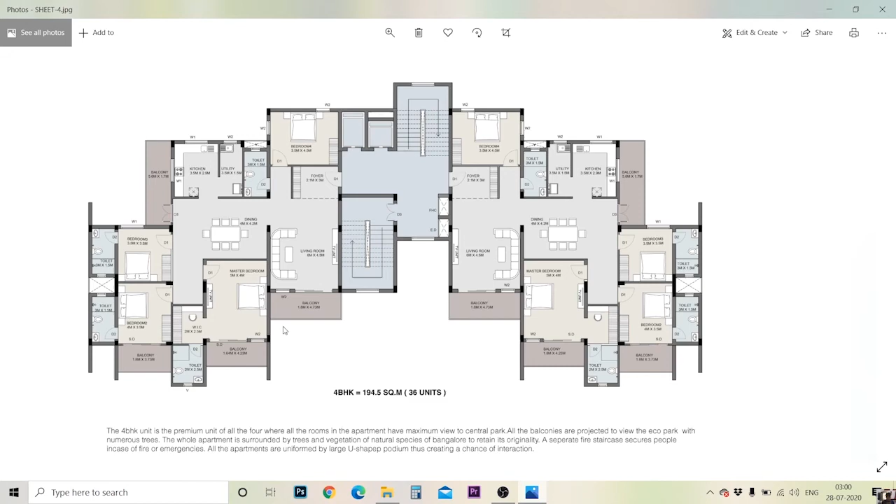In this plan, all the balconies have been projected outside to meet the beauty of the park. The 4 BHK unit is a premium unit of all four, where all the rooms in the apartment have maximum view to the central park.

This is the elevation, so you can see the overall view of the 4 BHK unit.

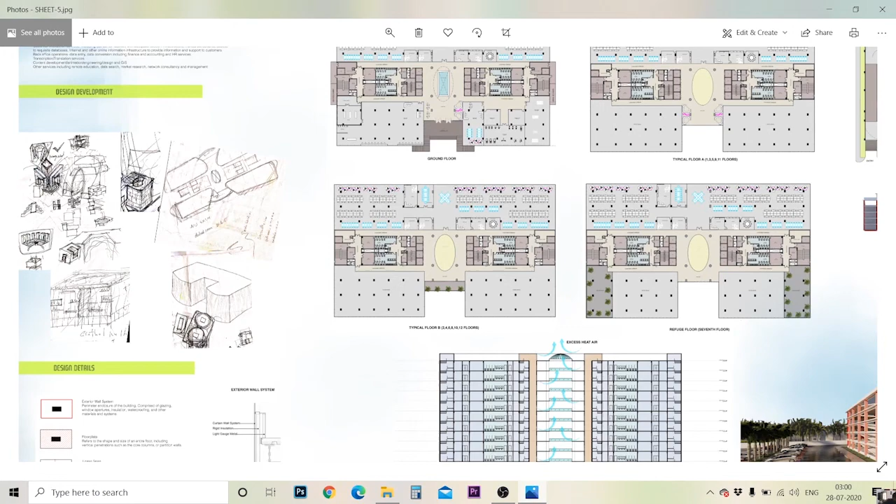The next one is the IT and ITES office. It comes under zone 2. This is design development sketches I did for the IT, and you can see the design details.

Exterior wall system: the exterior wall system has been designed with curtain walls, integrated with double glazing, to minimize the heat.

The core has been placed at the center, around which office spaces have been installed, so office spaces will get more light in daytime. This minimizes the energy.

The IT and ITES office can provide jobs to approximately 7,500 employees. This is a 12 floor office with all functions required to run an office. The core is placed at the center, so workplaces are defined equally.

There is an atrium at the center where all the excess heat will move upwards towards the sky, minimizing the temperature. The exterior facade is treated with double glazed curtain walls.

You see this is the ground floor. These are steps, and you can see a portico here. These are the ramp access to the portico. From the entrance you will see a great water body, and then upwards that's an atrium.

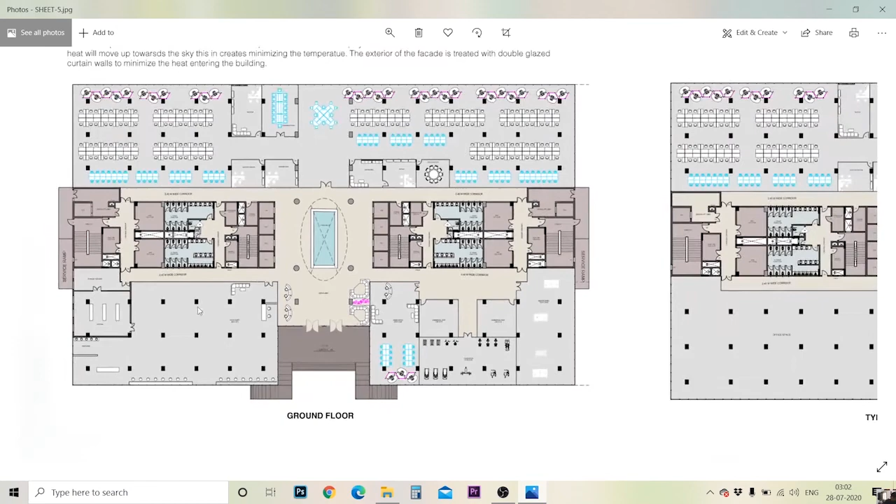This is a wide corridor giving access to toilets and a staircase. A separate server room, storage and pantries are provided with all necessary services.

An AHU has been provided at the end of the core to perform good ventilation.

At the end of the core, there is a fire exit. From there, people can directly exit to the outer surface of the building. There is also a service lobby with a service lift.

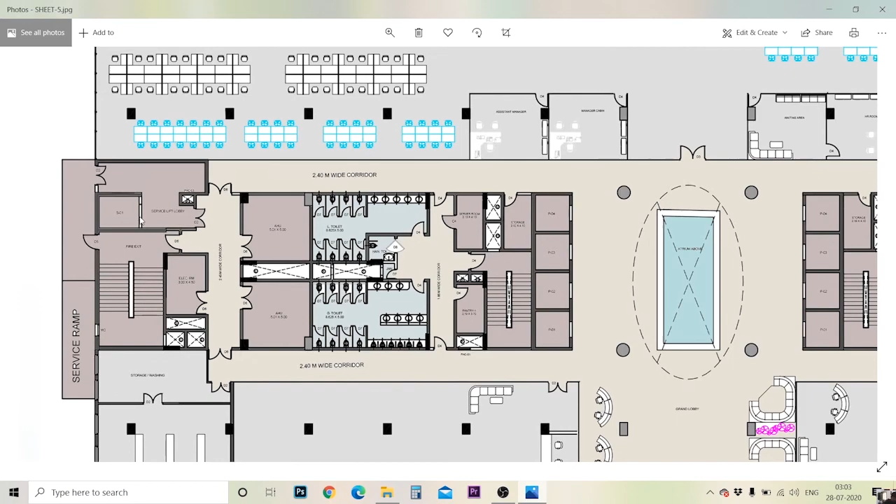So service people can directly enter this service lobby and search for services in case of any problems.

On the right hand side you will see an admin office, commercial shops, fitness, indoor games, and entertainment activities at the ground floor.

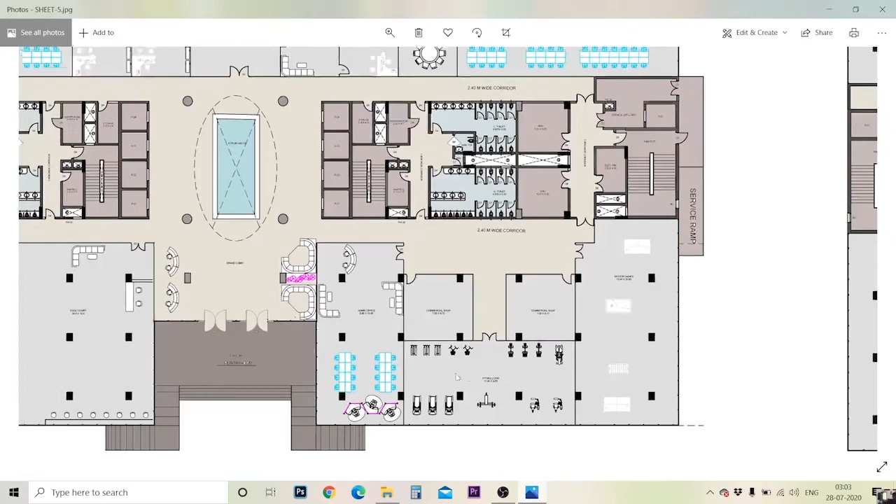This is a typical floor plan for the first, third, fifth, ninth and 11th floors. You will see an open office space, same as the ground floor but except for the food court and entertainment activities.

This is typical floor B. In this plan, you will see a balcony projecting out with trees, providing breakout spaces for all employees. This is a refuge floor located on the 7th floor with numerous trees.

So in case of any emergency, people can directly enter this refuge area. The section provides the

view of how the heat goes out towards the atrium. So all the heat gathers around the center and moves on, minimizing the heat and providing an energy efficient design.

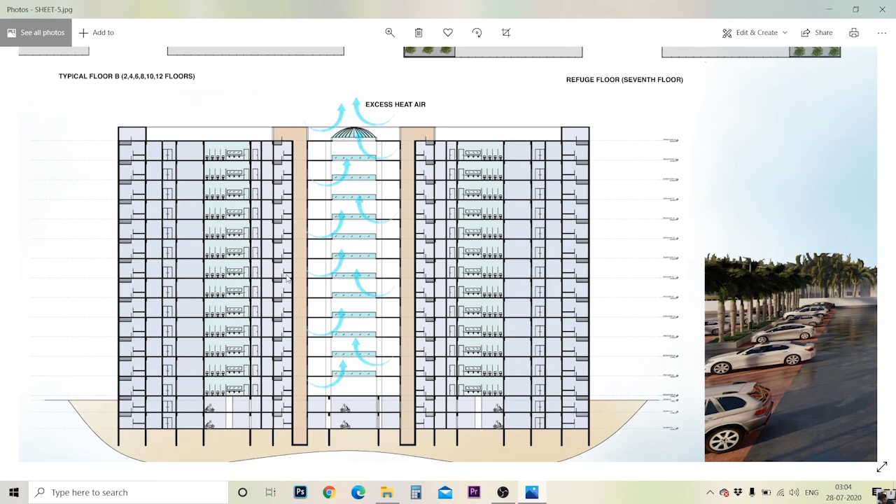The exterior of this plan is treated with parametrically designed facades. This parametrically designed facade not only gives aesthetic appearance but also provides control for internal activities, minimizing the heat from the solar sun's radiation.

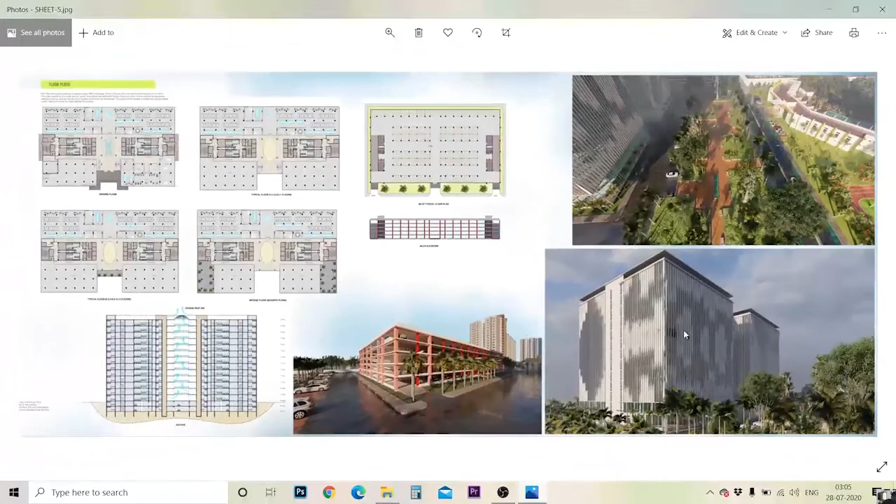This allows only light into the interior of the offices, minimizing the sun's heat radiation, so the amount of energy is minimized and energy efficiency is maintained.

This is the central office private park, designed in a puzzle form with numerous trees. This is a multi-level car parking plan

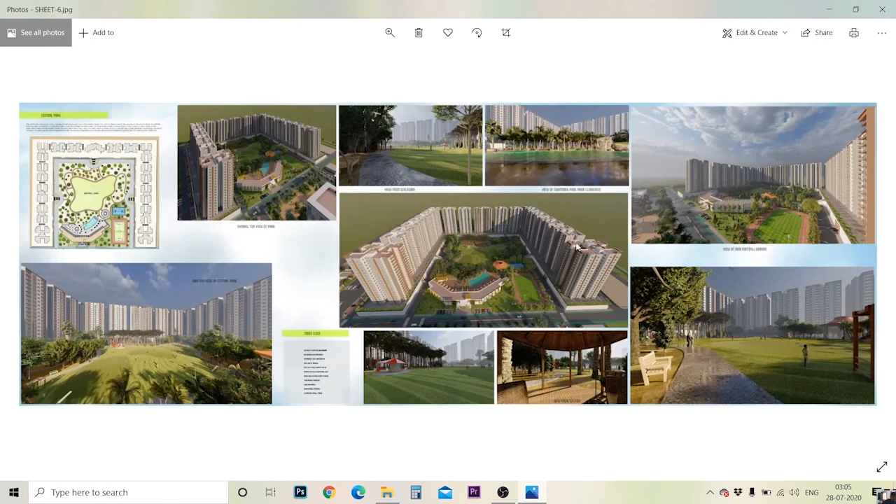with 5 floors. The final sheet of support is a view sheet of Central Park, so you can see this.

This is the Central Park area surrounded by apartments. This is the overall top view, as you can see: a clubhouse, pavilion, Central Park, trees, and mini football court.

This is the view from the walkway at Central Park. This is a swimming pool view from the clubhouse. This is the mini football court view.

This is another walkway view, and this is a view from the gazebo.